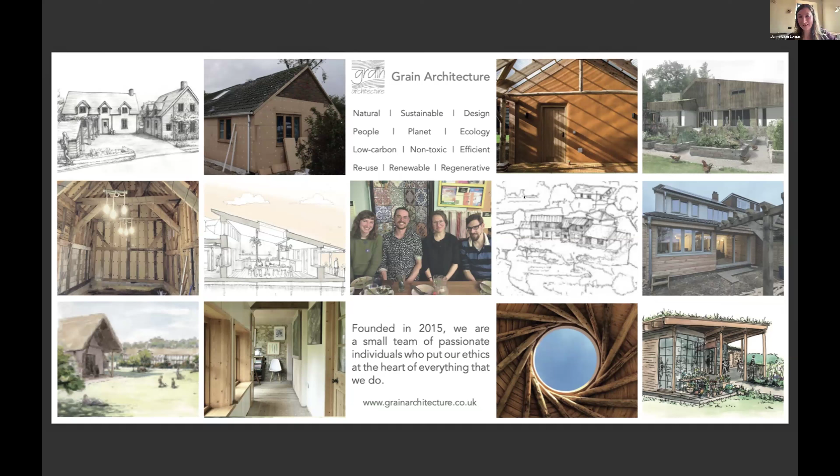Okay, thank you very much for having me. I am Janna Laan Lomas, and a little bit about my background: I work with an architect's practice called Grain Architecture, specialising in natural materials. I'm quite an advocate for natural materials generally, and we do a lot of projects with them, for all sorts of reasons, from resource depletion through to carbon footprint and healthy, non-toxic materials and building.

But we're obviously focusing on Llama Croft, which is my dream house, which I've been lucky enough to see come to fruition. It's still on site, so we're not quite finished. I'm sat in the kitchen at the moment, there's a few things going on around me, but I'm going to talk you through a little bit about how the building is made, the materials, how the materials work specifically with moisture, and give you a bit of a slideshow of where we're up to so far with the project.

So just starting at the beginning, this is us buying the site three years ago.

And there was a little old cottage. After much deliberation, we decided to dismantle the cottage and reuse the materials rather than retrofit. I'm not going to get into that now, but more could be said on that, obviously.

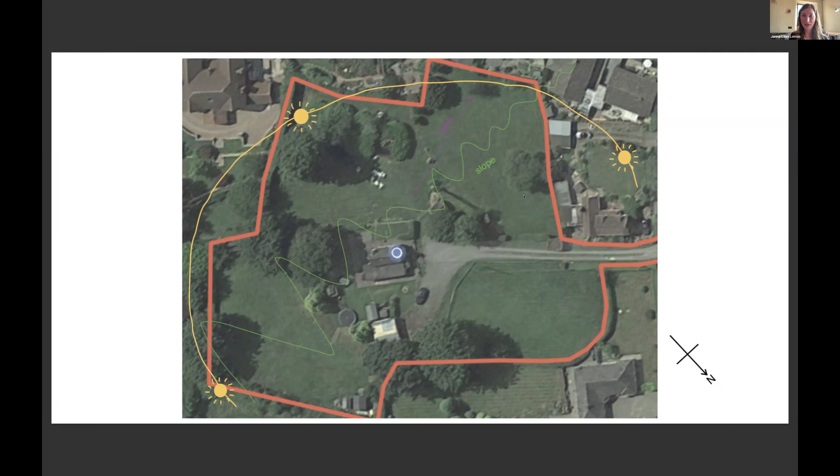And we're very lucky, we've got a lovely site, southwest facing. We also discovered very early on that we have amazing clay. We're based in Hereford, and Hereford has this really gorgeous red clay. So we tested that out with making our own clay plaster.

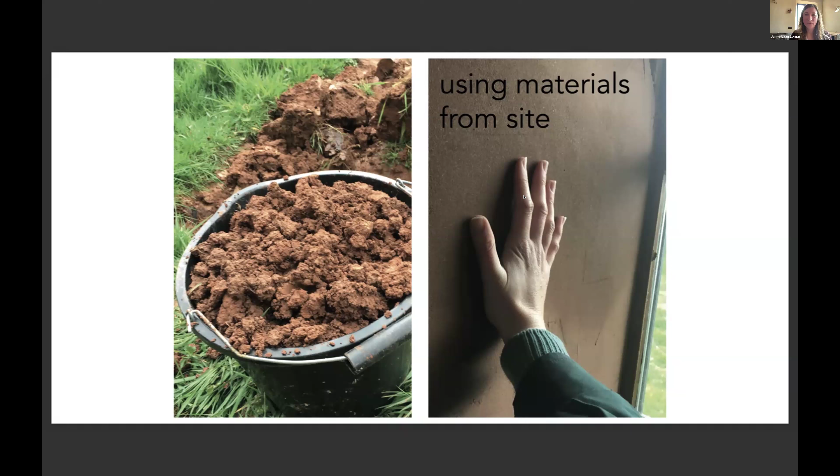So we started off by actually building a little tiny house. Here it is, which we lived in, and are still living in 2 years later, throughout the build process. But this was a test ground for the clay plaster, and we were really happy with it, so we decided we'd do that in our house.

So that's one of many natural materials we've got in the house. I'm a huge advocate of natural materials generally, so I don't have necessarily one favorite that I'm pushing more than others. We've chosen a system for various reasons, but we've tried to include as many different natural materials as possible in the house. Partly because we just want to show them off and share as much information as possible about them, but they also have really good properties, a lot of them.

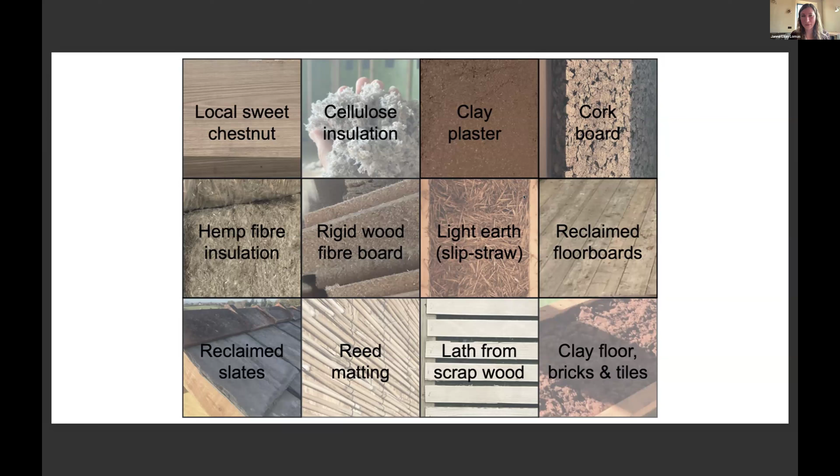So the system we've chosen, for various reasons—a large part of the reason was timescale, to be honest, speed of building, but also quality—we decided to go with a prefab timber panel system. That is basically filled with cellulose insulation, which is old newspaper, and then wrapped externally in wood fibre board.

The floor, walls, and roof are all made like that, but the floor and roof are not prefab panels, they're sort of the same idea. And then the walls are prefab panels.

This is a section through the floor. So we're just showing here that we've lifted it off the ground, away from moisture. We've got a well ventilated space under the floor, and that means that we don't actually have a damp proof course or a damp proof membrane, as it were. So we haven't got any membranes, really. I'll talk a little bit more about airtightness membranes in a minute, but no vapor membranes or damp proof membranes.

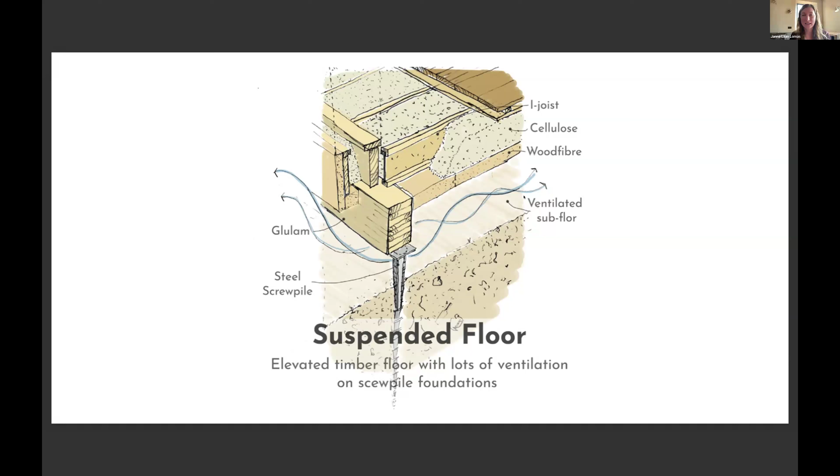Here we've got the screw pile foundation, a glulam ring beam, and then on top of that we've sat the joists for the floor and then the structure for the walls. So here you can see the structure for the walls as well. We've got a Larsen truss, which is a split frame, uses smaller timbers, which is great. We've managed to use C16 timbers, which is great, so they can be UK sourced. And also it means it's more thermally broken.

So another reason we went for the prefab panel system is because we wanted to go for Passivhaus certification. We've collectively done talks on Passivhaus, so if you're interested in that, go and look there. But basically, what that means is it's really thermally efficient, it's airtight, and it's minimizing thermal bridges.

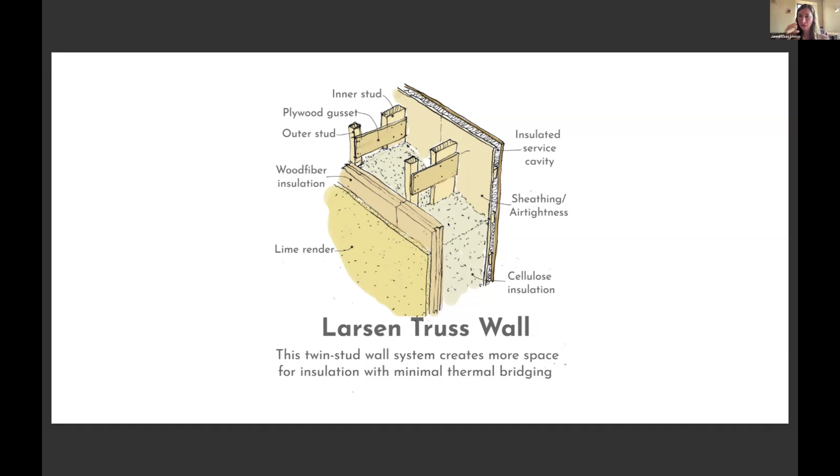So this shows the spaces—yeah, so these timbers are joined just with small gussets, but most of the two sides are kind of separated. And the same happens with the roof. We've got a sort of thermal bridge free eaves detail shown here, and again, this shows the sort of separation.

And then we've got the wood fibre board wrapping all the way around the outside in one continuous layer, and that's a really good way of reducing thermal bridging generally. But we've also reduced having any timbers fixed through or penetrating through that layer to create the eaves overhang by doing this.

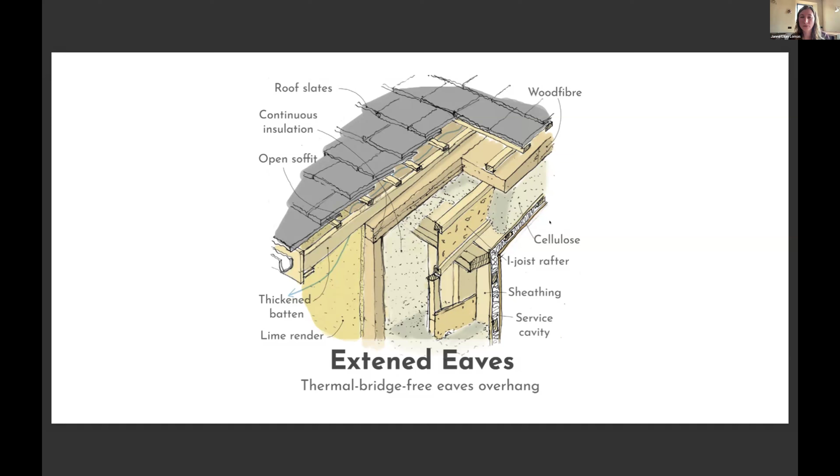You also might notice we haven't got any membrane on the roof, and that's also to reduce plastic, but we don't need it because of the wood fibre board. This is a type of rigid wood fibre board which is relatively hydrophobic—what that means is the water, if there is any rain that comes through, runs off of it and doesn't really soak in or penetrate, so it doesn't need a membrane. This only works with roofs of a certain pitch, not flat roofs or low pitch roofs, but with this it works really well. So that gives you an overview of how we've made it.

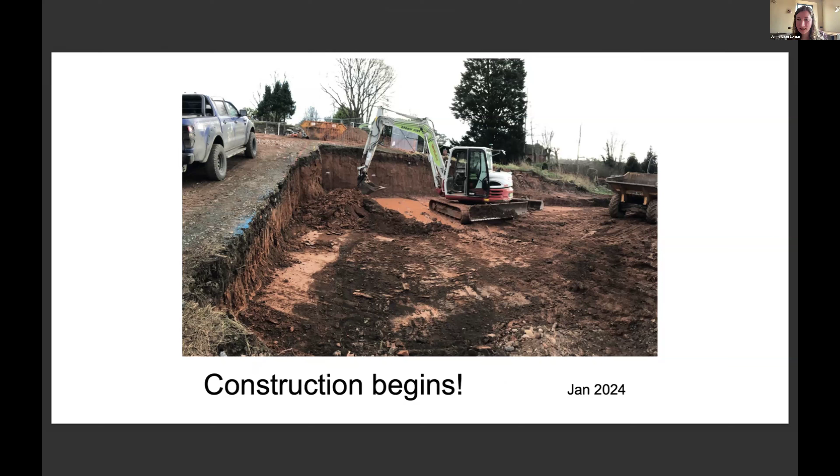So we started January 2024, just about January, February, with a lot of mud on site. So a lot of groundworks were going on site. Meanwhile, the prefab panels were being built off site.

And then by March, I think we still had a lot of mud and rain, but the foundations started going in, the screw piles. And these are wonderfully simple. I think Seb might talk more about these.

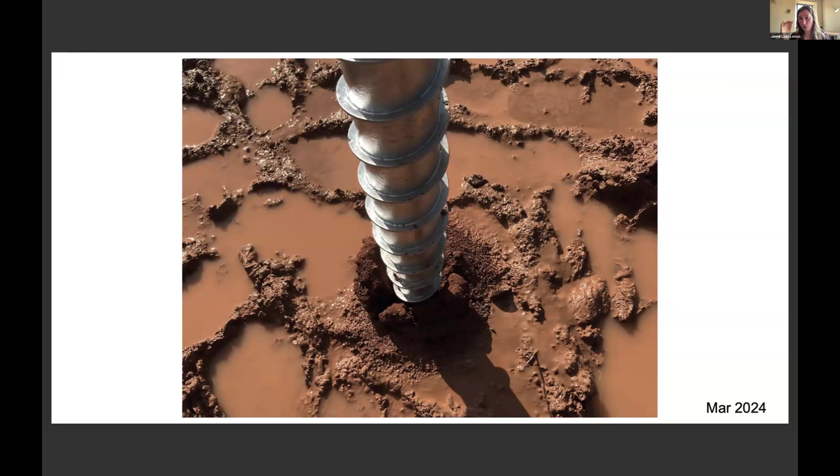Yeah, so they're very simple. They're only actually 1.6 or 1.8 meters long. And yeah, they simply screw in and hold the house down. So that's it from above.

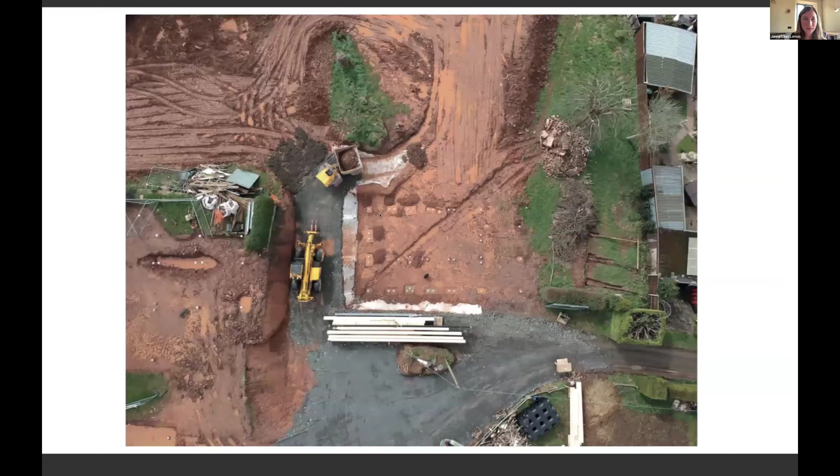Seb's got a drone, so we've got some lovely footage from the sky, and you can see there. Can you see that zoomed in? Yes, awesome, that works. So yeah, so we've got you can see all the screw piles there.

They had to actually dig slightly around them to just get the fixings for underneath into the glulam, and a land drain as well, just to make sure the drainage was there.

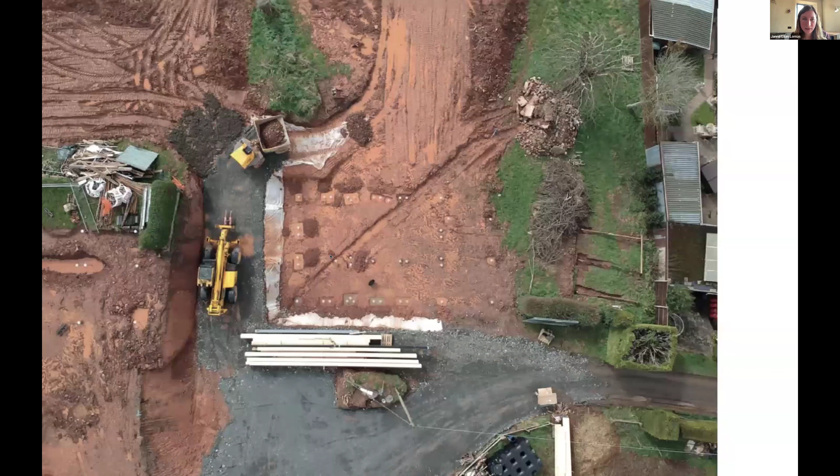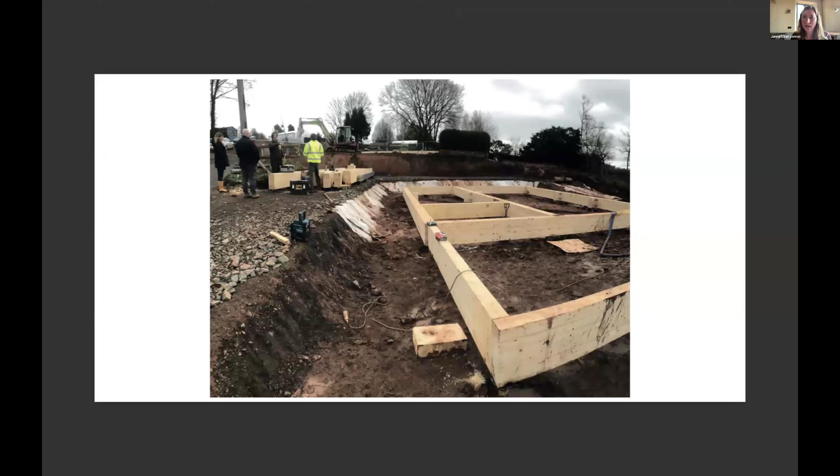So then they fixed the glulam ring beam on. There it is. And then we started with floor joists, the rigid wood fiberboard on the underside, which was a fun job for someone to do the fixings.

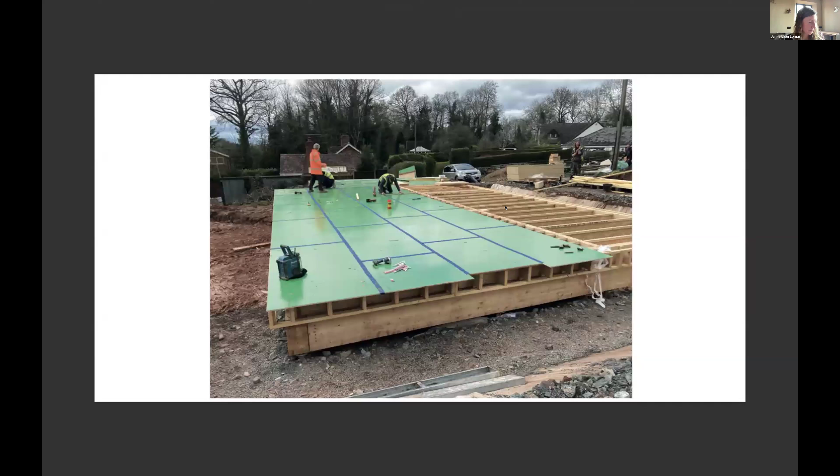And then the pro passive board. So this green board is the only real sort of plasticky bit in the building, I'd say. And it is also the least vapor open.

So one of the major drivers for using natural materials is about the moisture management properties of them. I'm going to assume a level of knowledge here and explain that moisture, or water vapor in the air, will always be attracted to cold surfaces. In this country, primarily, that means in winter, the outside is colder than the inside, so the outside is attracting more moisture generally because it's colder. So we have a sort of direction of movement, and that means that we want to avoid having a surface which can trap moisture on that cold side, on the cold surface on the outside.

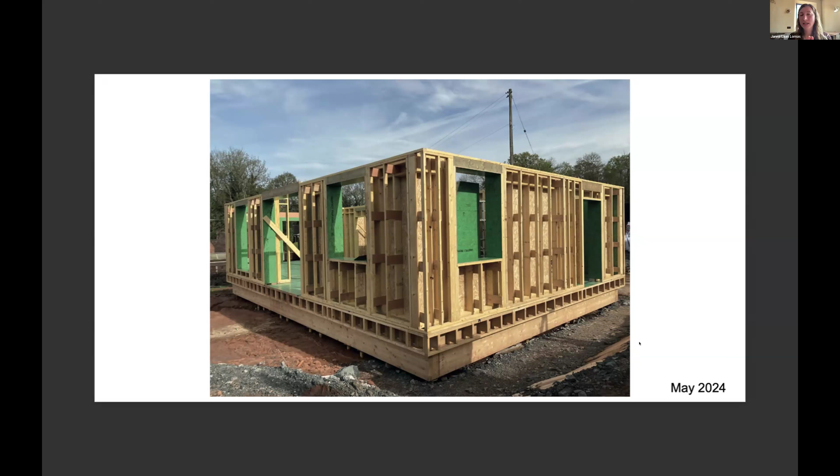So we have a vapor permeable buildup on all sides from the airtight layer outwards, but the airtight layer itself is actually not particularly vapor open. As you can see, there's this green film, which is adhered to the OSB boards. The boards are needed for racking strength anyway, and they're already not very vapor open. So it's not vapor open and closed, it's not binary - there's a sliding scale, vapor permeability. It's not 100% closed, but the OSB boards are relatively closed compared to the other materials we're using, which is the cellulose, the natural wood and wood fibre board, and lime render.

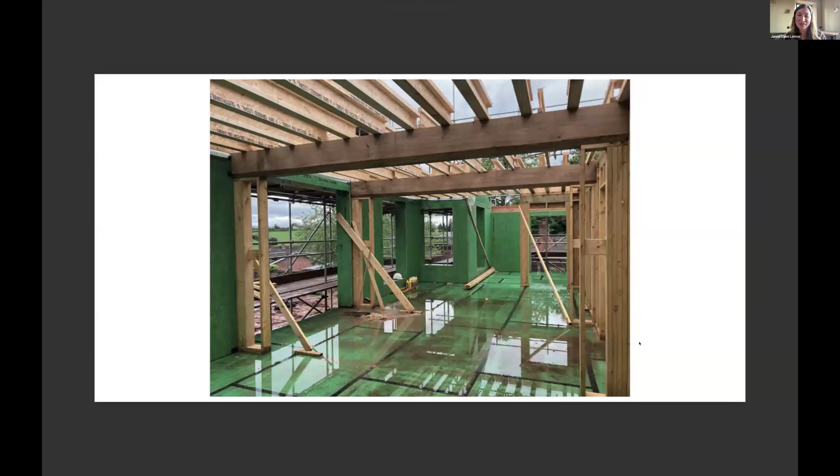So yeah, moisture, you can see doesn't really, there's a lot of moisture there. It was raining whilst we were doing this. But yeah, these panels were great because they go up very quickly.

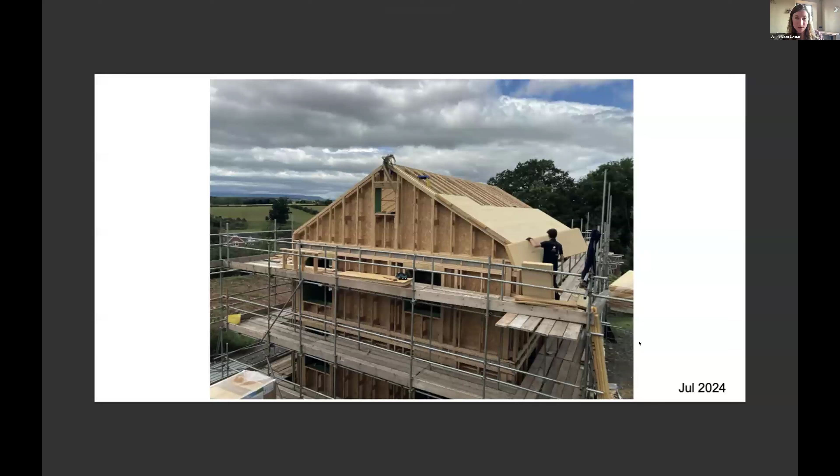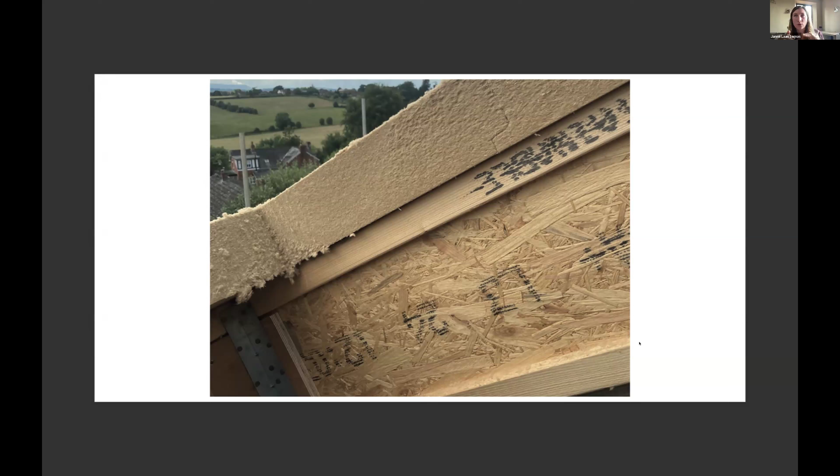And then we got to, this was last summer, we got to starting to wrap the outside with wood fibre board. And there you can see the nice joints. This is quite thick - I think we had 100 mil on the roof and underside of the floor of wood fibre board, and 80mm on the walls. And then the actual thickness of the insulation was 300 for the roof and floor, and I think was it 340 for the walls, something like that.

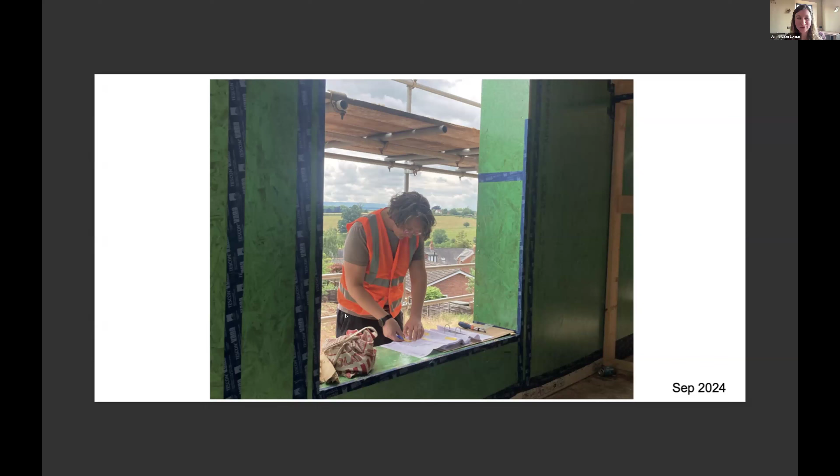So yeah, that went on, and then no membrane, but there you can see the lovely slates going on, reclaimed slates, of course. And there's Seb putting in some moisture meters, which he's going to talk more about. But this has been a really interesting thing to have data from.

Windows and doors went in. Here you can see that eaves detail, again, the wood fibre board wrapping around. And yeah, all the timber panels slotting together.

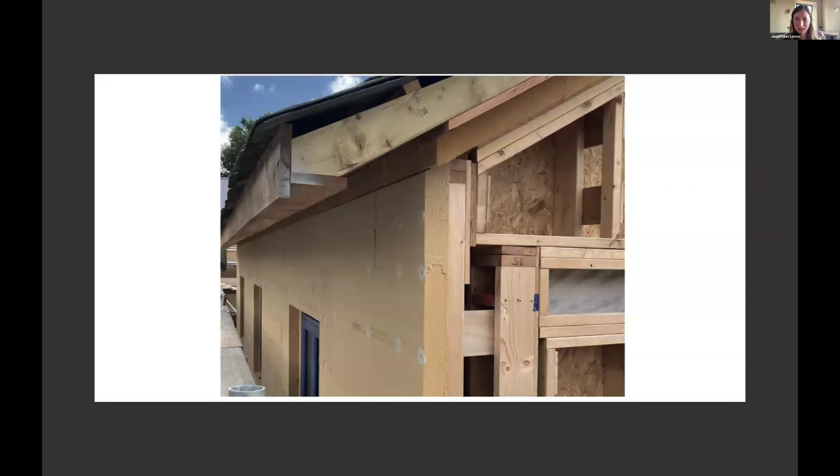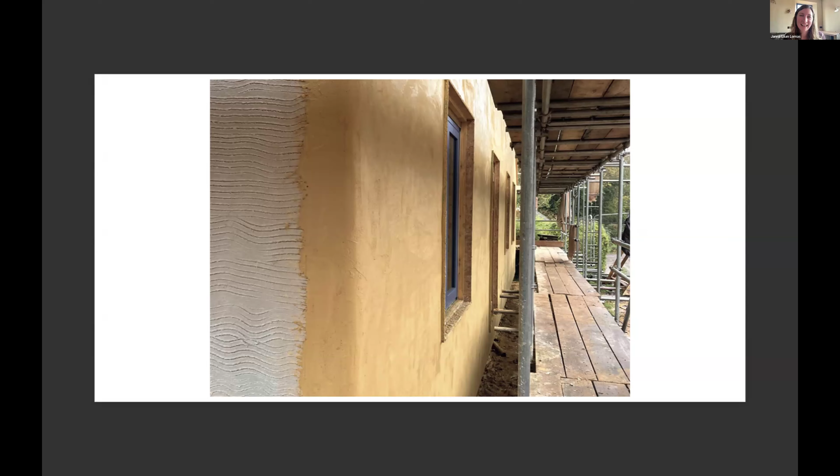Just some nice shots there. We started the lime render on the outside, so the lime render goes straight onto the wood fibre board. Got the base coat, scratch coat, and then the top coat, which is pigmented, so it's got a lovely yellow colour. And there it is. It doesn't look very different now, really, but we're still landscaping the outside.

So then at Christmas, we basically started work inside after they finished insulating it. So here you can see them, they cut the holes and pumped with the machine - it's like a vacuum cleaner in reverse that sort of pumps the cellulose insulation into all the cavities in the wall, in the cassettes. And then they tape over the holes again afterwards with this airtightness tape.

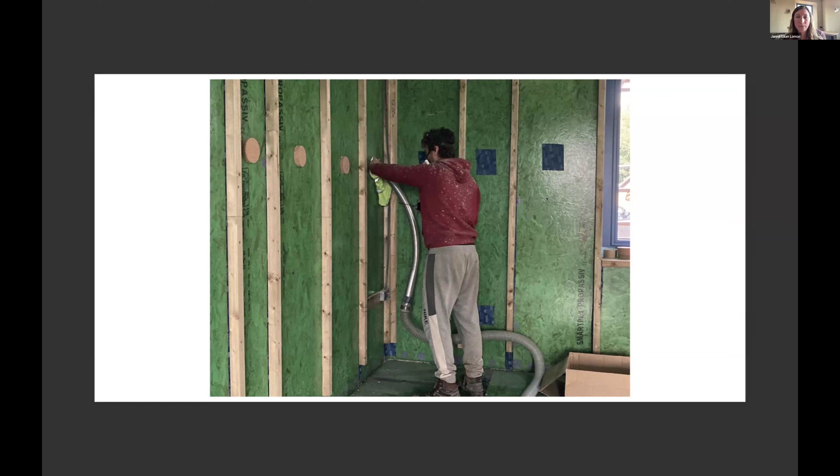And that's really important because of the moisture wanting to move towards the outside where it's colder generally. So it's important that's managed well, and that if there's a layer that's less permeable, it's on the warmer side rather than the colder side, to avoid any moisture being trapped in the wall. But on the inside of this

airtightness layer, we've then used a whole myriad of lovely breathable materials, many of which are also hygroscopic, which means it goes one step further than breathability. It means they can actually manage the indoor humidity by sucking in moisture when there's excess humidity and holding on to it, and then releasing it again when the humidity levels drop.

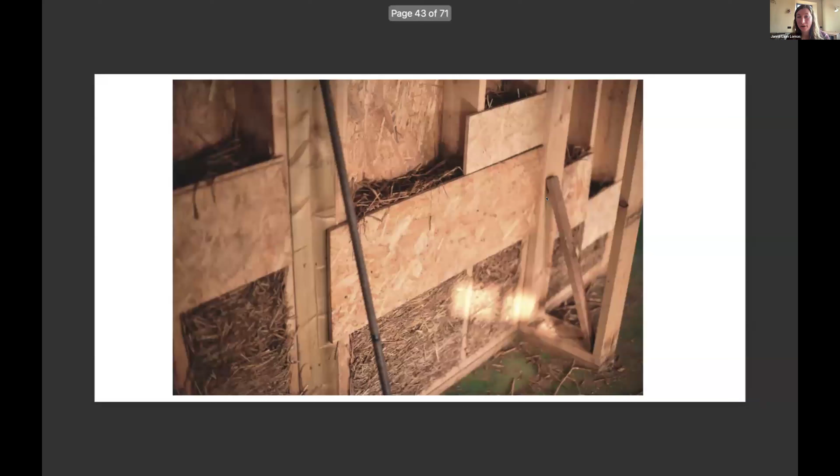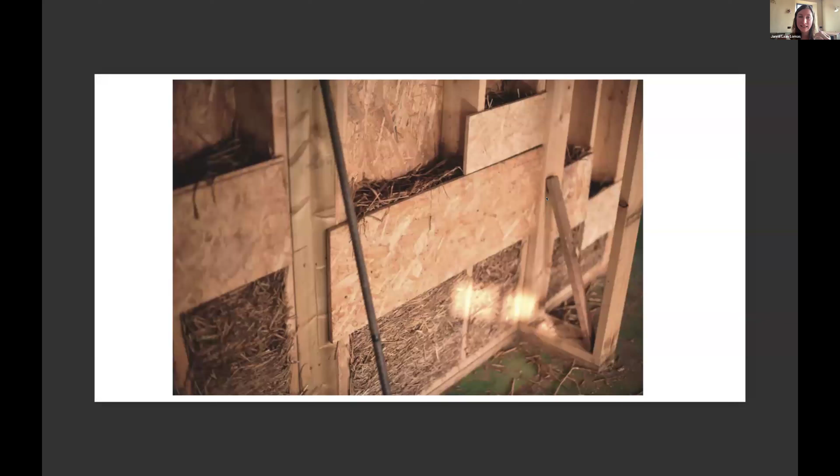Wood is very, very good at that, but also clay, and we have this lovely clay. So we've ended up with a lot of clay-based materials and clay plaster. This is showing light earth, which is a type of insulation with straw tossed in clay slip and then tamped into the wall, a bit like hempcrete. And then you remove the shuttering and it dries out. Great surface for plastering. This provides us with insulation, both thermal and acoustic, but it's an internal wall.

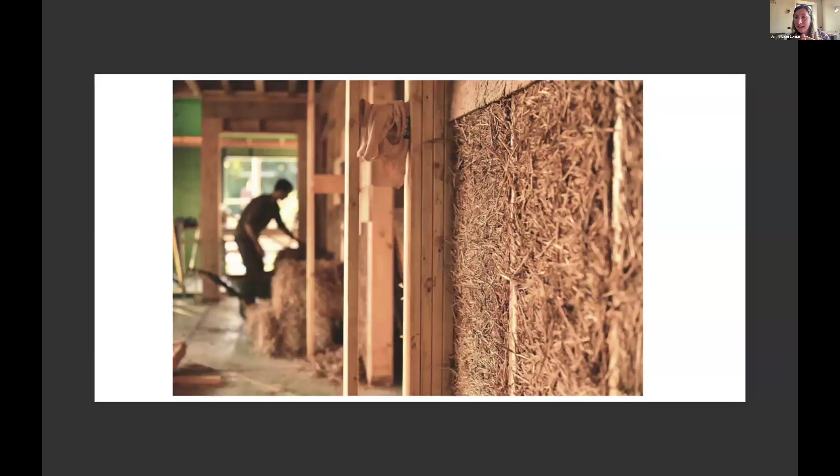And we also had quite a lot of waste timber, which we turned into lath. This was a fantastic way of using up the waste from the site, because the building site generates a lot of waste timber. We've reused as much as we can in various different ways, but lath was a really good method.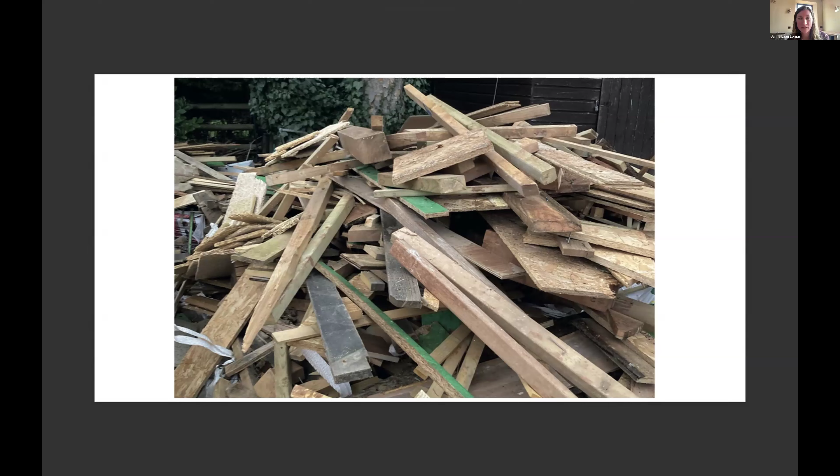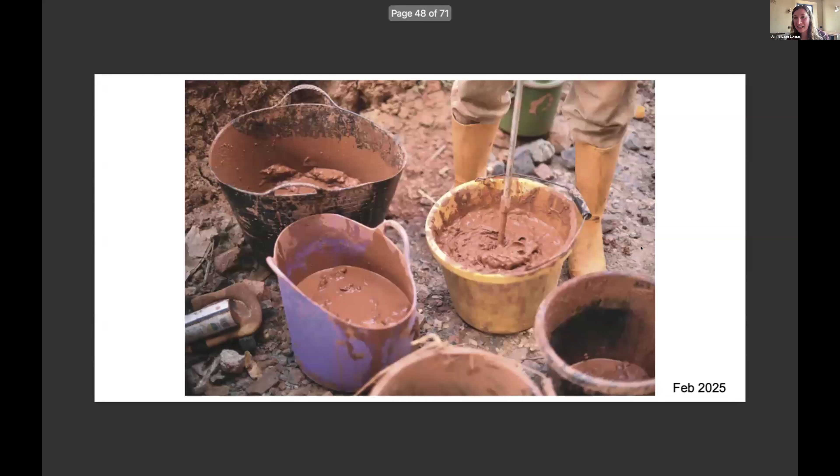We've also used reed matting to plaster onto, which has been great, particularly onto the internal OSB walls. And there we are, mixing up some lovely red clay and putting it on. And that's been really, really good at sucking in the moisture, managing that indoor air humidity.

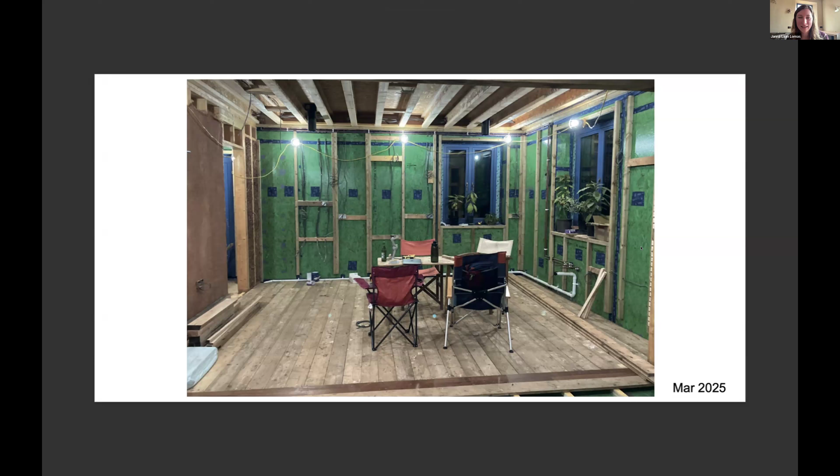And that's the kitchen where I'm currently sat, looking a bit different. That was March this year. And Seb did the floor. We've come a long way.

We're also using scraps, including wood wallboard, which is just for window reveals.

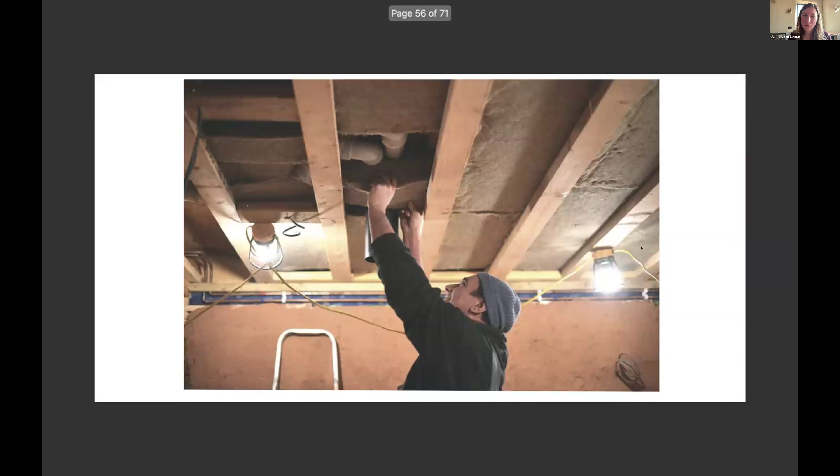We've also used hemp fiber insulation in all the intermediate floors, and that's also very good at managing moisture and also very good at acoustics. It's a lovely material.

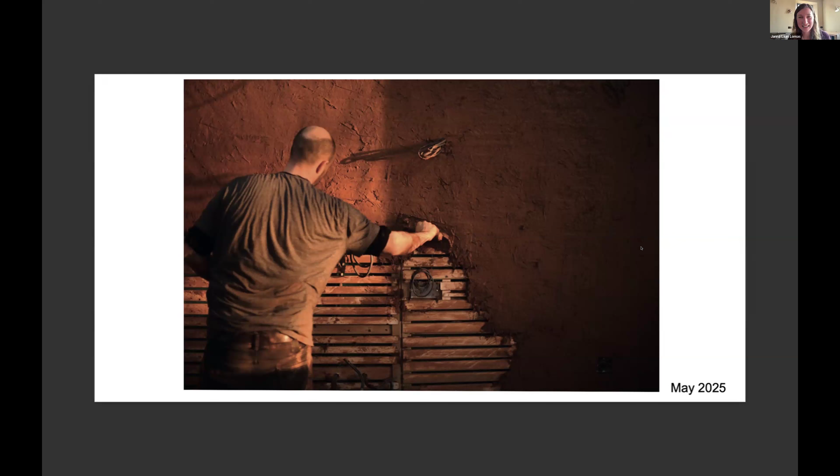This is just a nice picture of clay plastering. I just really like this picture, bringing out that lovely red colour in the clay.

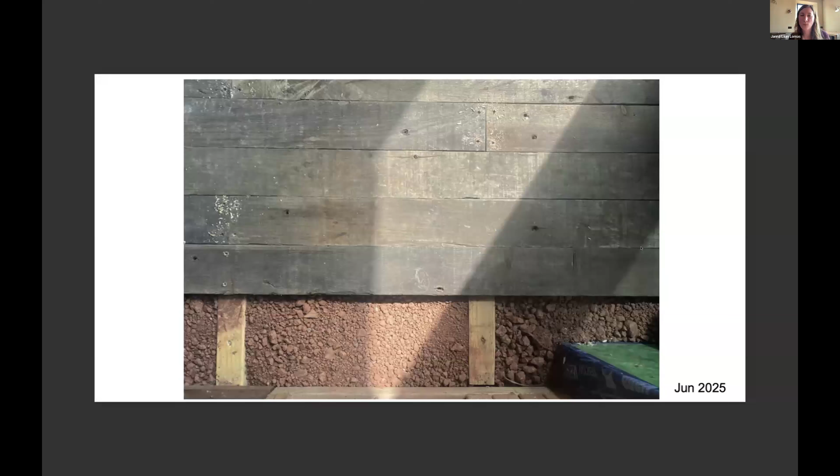We've also used earth in the floor. So we've got this service cavity all the way around, which is normal, but we've also got it on the floor. And what that means is we can fix down the floorboards into the battens, not penetrate the airtight layer. We also have this void between the battens, and I decided let's fill it with clay, because that will help with both moisture and temperature, so we can use that as a bit of a thermal store. Here you can see the sun hitting it, and it beautifully holds that solar gain, that warmth.

It's really nice, so still working our way through it. I'm almost there now. Seb's been doing some joinery as well, and this is us this week. This is where we're up to. Still a building site, but we are getting there.

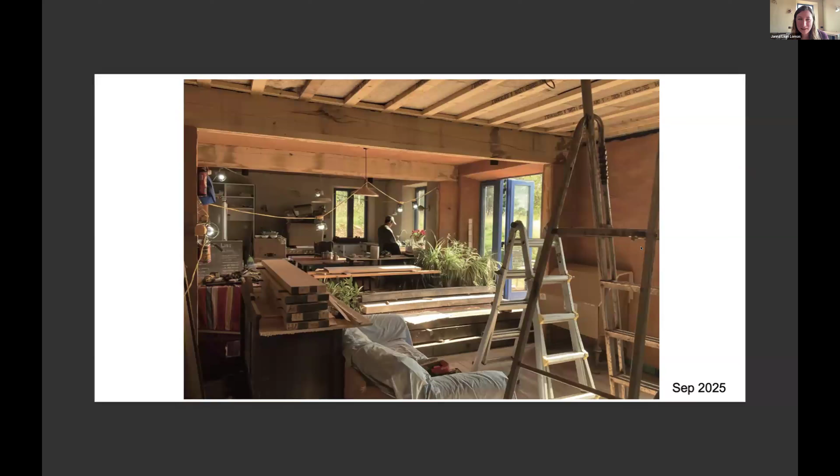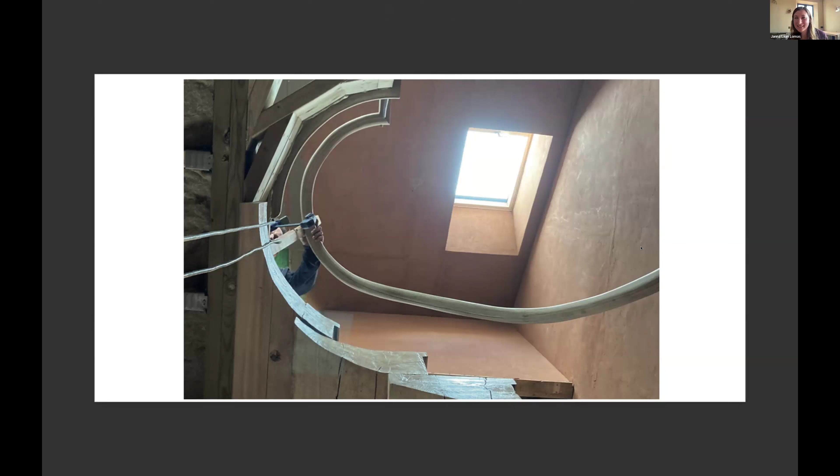And then we have this lovely staircase going in, currently built by Carwyn, who is sat in the room with me here smiling. And there he is building our stairs, which are these really nice oak chunky stairs. I just had to share that with you.

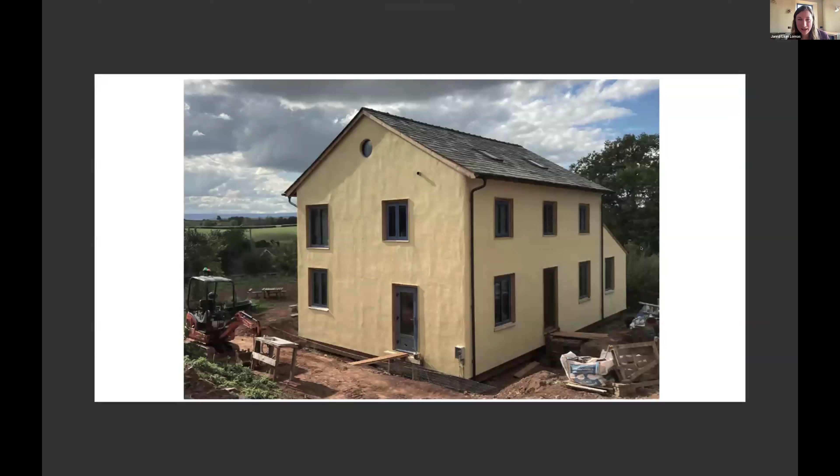They're still being built, so I can't share finished pictures, but they are looking rather lovely. And that's it, that's how the house is made. So I'm now going to pass over to Seb to talk a little bit more about the moisture meters and the data that we've got from them. I think that's your focus, isn't it, Seb? So yeah, over to Seb.

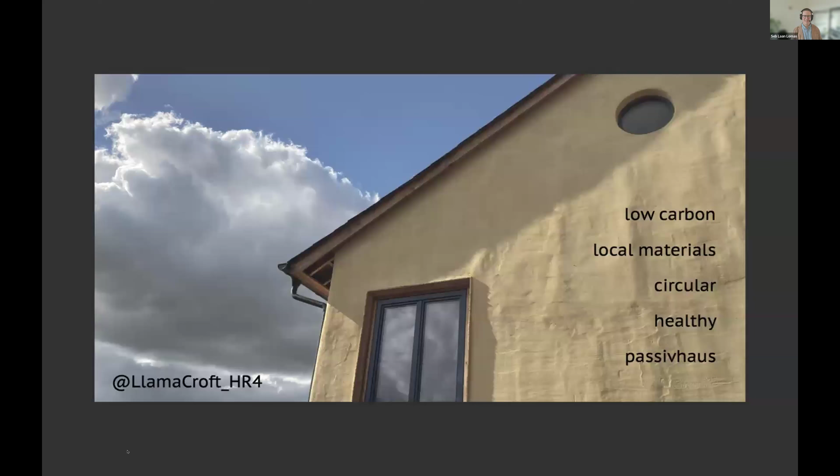We appreciate it. I'm Seb, Janna's partner, and I'm going to talk a little bit about some of the sensors that we put into the building. As Janna mentioned...

Some of the things that we've been doing are things we've wanted to explore. There's one's understanding of how something should work, and then there's the other bit of actually having the hard data behind it to be able to show it has done what you said it was going to do, or hoped it was going to do, and maybe not - maybe there are some learning points. So that's why we've gone on this journey from a data perspective.

Just from a bit of scene setting, I'm sure everyone on this call is aware just how significant moisture is from an insurance perspective. There are now more losses from moisture than fire in the construction sector, and despite a lot of the research actually being around fire and not so much around water, there isn't as much guidance.

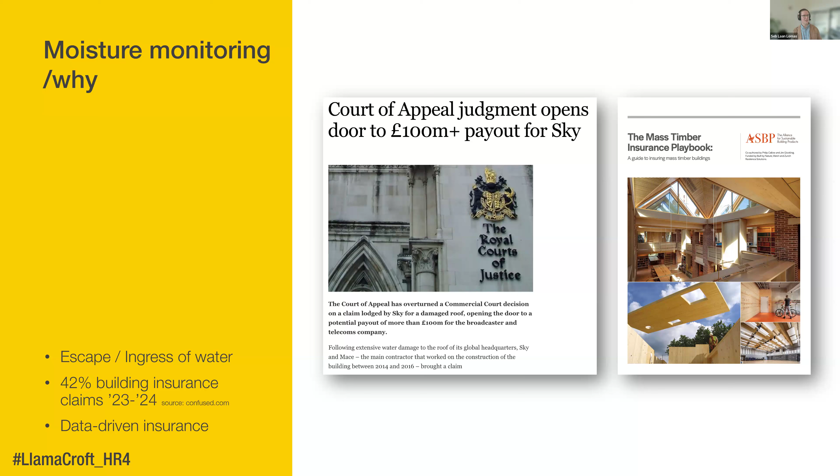Matthew shared a really interesting one that TDUK put out recently about managing moisture in construction, which I definitely recommend having a look at. But it's an aspect of construction that needs still more clear guidance on how we can mitigate, and then also demonstrate that we have mitigated those risks, because that's a really big part of negotiating and courting the insurance, as some would say.

But from our perspective, this was more led by curiosity in the work that we do in our practices. We want to be able to advocate for these platforms, these approaches. So our house was a really nice test bed for trying out a platform I had never used before - I was introduced to Tector, which Ben Sharples is going to talk to you more about, the company itself. But it's a really nice, simple platform.

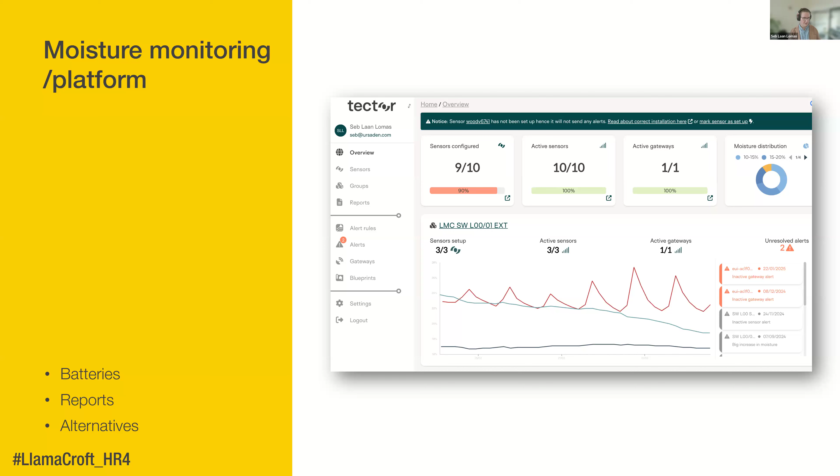It has these very small units - I haven't got one to hand - which you then just build into the building. The data is streamed to the platform, which you can log into and run reports. It also triggers alerts if something changes by more than 5% in an hour or so. We have used other platforms and sensors at Architype before, but this is definitely the most progressed and user-friendly one that we've come across.

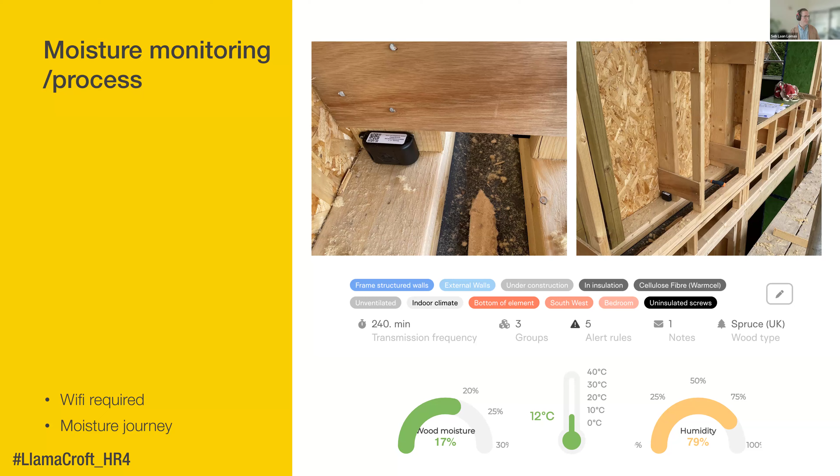And as you set up these items, you take photographs, you put in all the metadata about where it is, what it's connected to, is it insulated or not. And then the 3 bits of data it's collecting are the moisture content of the piece of wood it's screwed into, the temperature surrounding the sensor, and then the relative humidity surrounding the sensor. Interestingly, this is an emerging sector - there's no quantitative guidance on where you should put them, how many you should have.

It is a qualitative judgment. So we decided to focus on the things that we were interested in learning from.

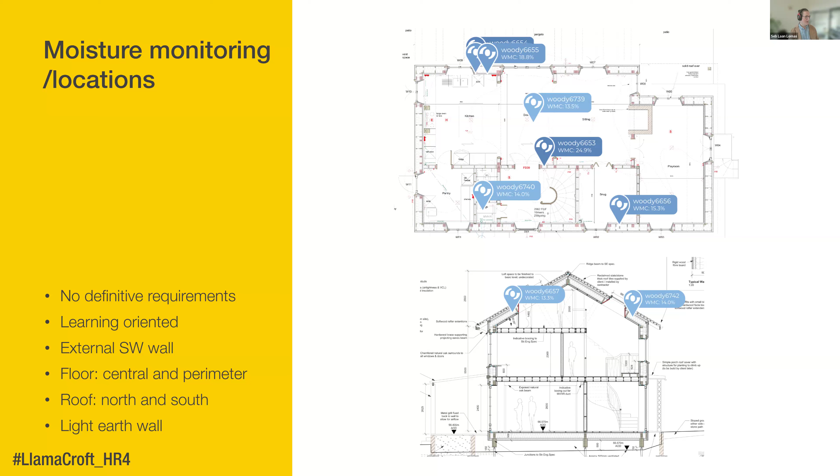We've put sensors through one of the external walls, so we can actually see the moisture movement through the wall. Put some in the roof and some in the floor, and also the light earth wall that Janna shared in her presentation. I'm just going to take you through some of the outputs and findings we've had to date.

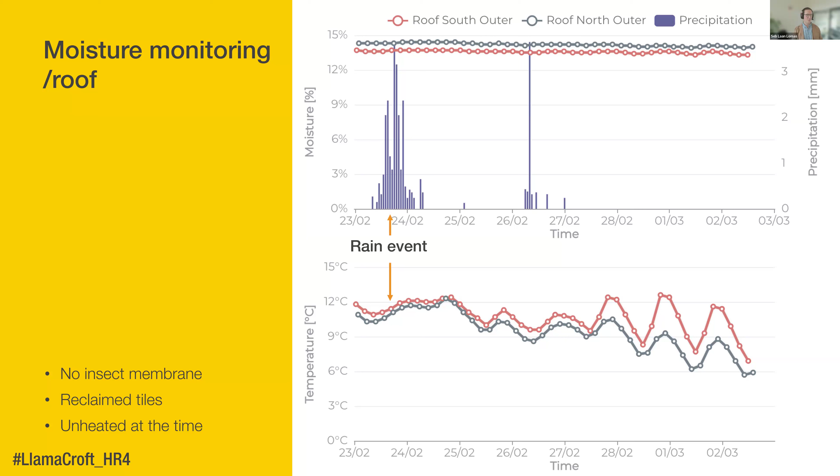What we were able to show from this is that the moisture content in the roof below this buildup has been exceptionally stable, even with the very heavy rain events you can see with the vertical blue lines on the graph. This platform automatically draws on local weather data.

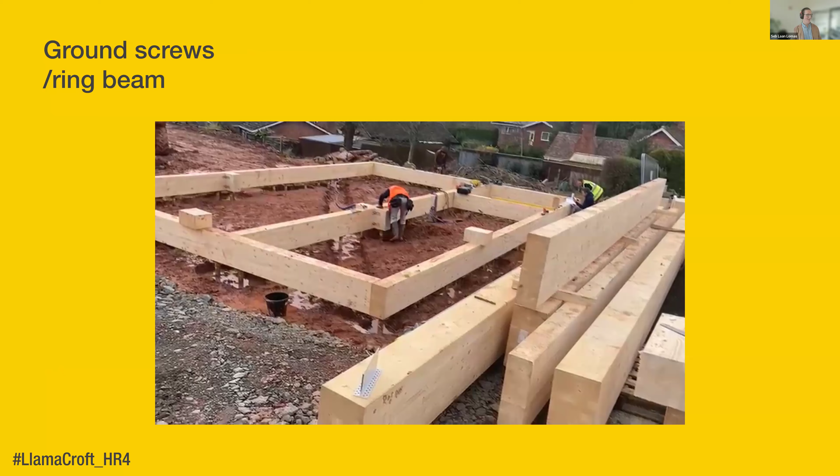As Janna mentioned, the ground ring beam is a glulam system sat on screw pile foundations, which were a delight to finally use on a project. There are loads of reasons why we wanted to use screw piles - touching the ground lightly, something that goes in quickly, but also it's 70% lower in embodied carbon. And that's not just because it's easily reusable, but the production of it has a lot lower emissions, as you can see from these EPDs.

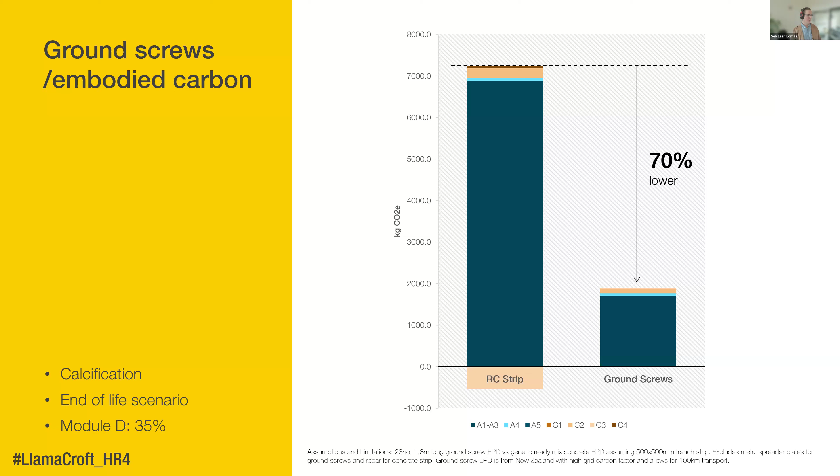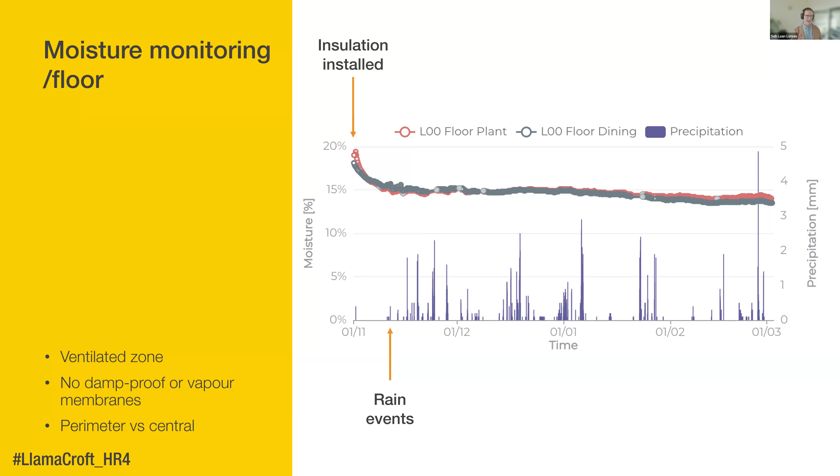With that ventilated space, we wanted to see how well that worked from a moisture perspective. We all thought it should work, but it's nice to have the data to show that it does work. What you can see here is 2 sensors underneath the building, in the floor buildup on the ground floor, the moisture of the timber drying out as the insulation's been installed and the building's warming up, and that moisture content coming down below 15%. That's both within the middle of the floor plan and by the outside of the building. We wanted to see if there was a significant difference between those two.

This has been a really interesting insight. This is the external wall of the building facing south. So we have sensors here on the outer timber of the Larsen truss, the inner timber of the Larsen truss, and also inside the service cavity, which is the light blue line you can see here.

What we've been observing here is, as Janna mentioned, with a breathable construction, the wall is able to absorb and desorb moisture. What you can see in the bottom graph is the outer timber is absorbing and desorbing on a daily basis as it responds to the temperature. As the sun swings around, it starts warming up the plaster, and the moisture is drawn into the cooler element of the wall buildup, and then it desorbs back. But what's really nice to see is, even though the outer timber is fluctuating in that safe zone, the inner timber is completely unaffected by this absorption and desorption going on daily.

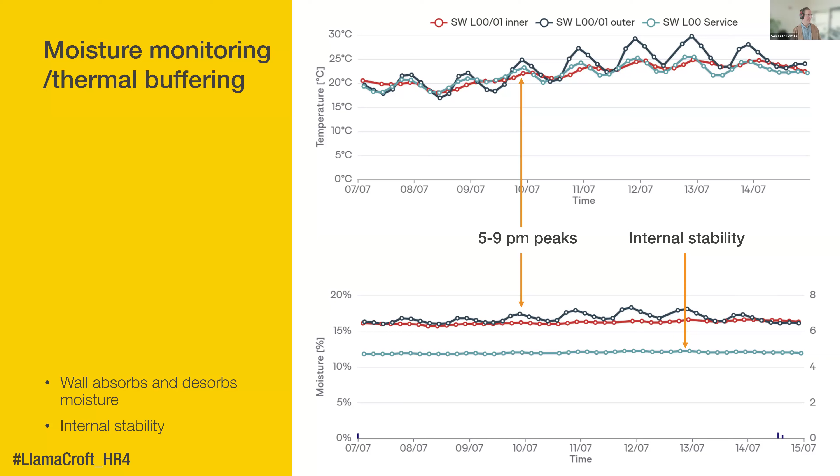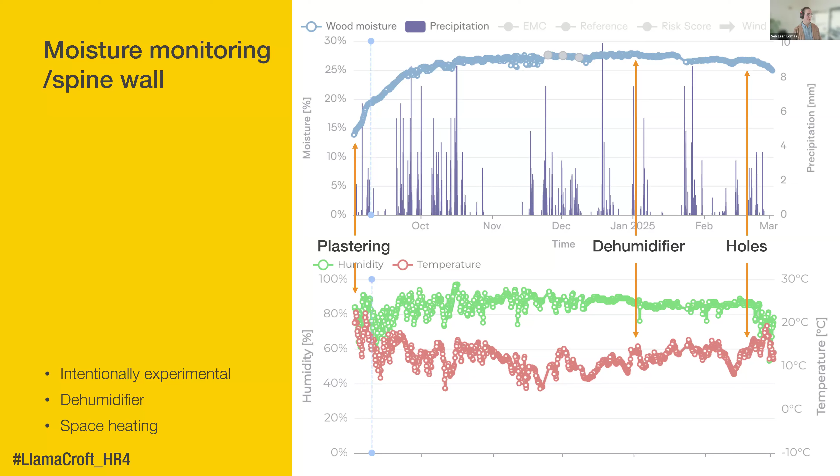Janna mentioned this spine wall where we use light earth, and we had some OSB board. What this experiment showed is that OSB really does inhibit the drying out of light earth construction. You can see the moisture content racing up, and we used dehumidifiers, and then had to drill holes in the OSB to draw out the moisture. But again, putting in the sensors gave us that feedback. This was an experiment - we knew it wasn't ideal, but getting this feedback in real time was really interesting.

Similarly from the external wall - what this graph is showing is actually the sensors just before the external wood fiber board that Janna mentioned was installed. The timber frame got really wet from a series of rain events. It was a really horribly wet year in 2024. You can see here the moisture content of the timber getting up over 60%, which is way too high, and certainly not an ideal moment to then clad the building in insulation. But as Janna mentioned, with the breathability of that whole wall system, the Tector sensors were able to show the frame actually drying back out over the next period.

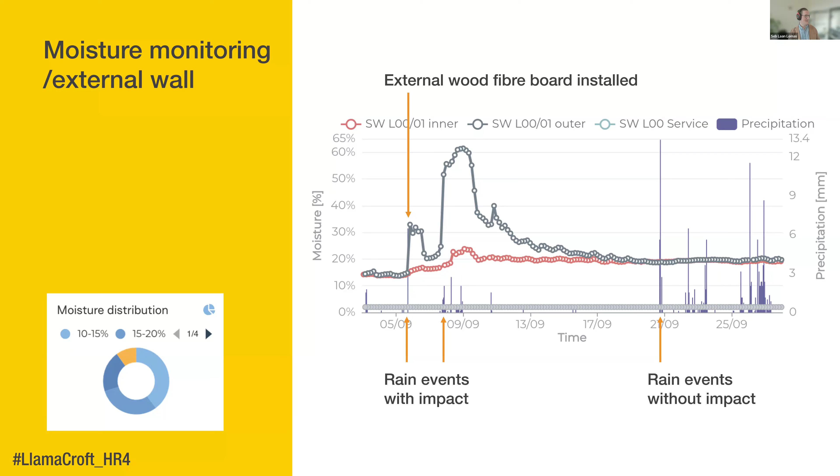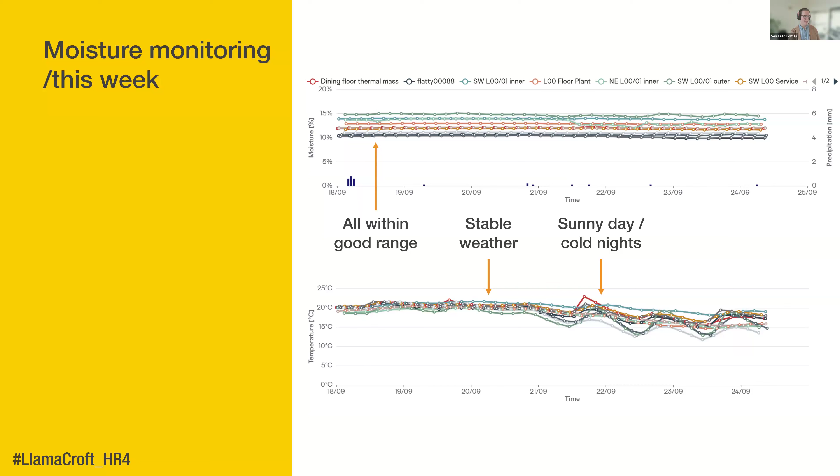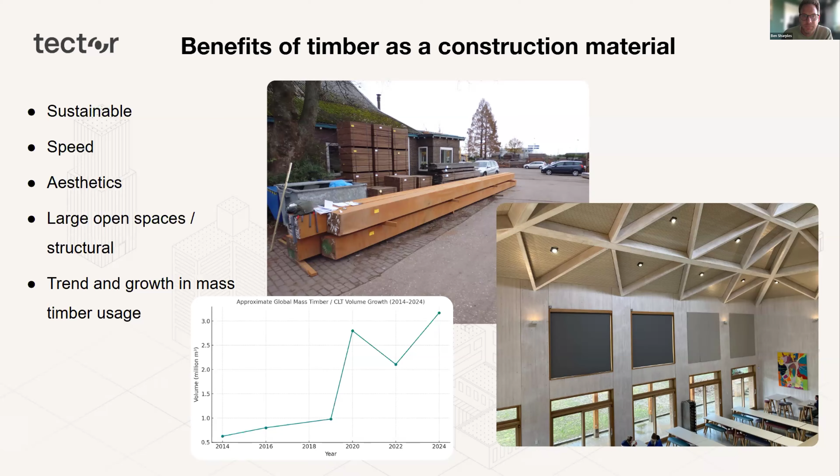But with that, we do obviously need to understand the vulnerability side of timber as a material. Once we have a good understanding of that, we can plan and build into the design ways to mitigate the risks associated with it.

Timber, as Janna said earlier, is a very hygroscopic material, so it's predictable—it absorbs moisture and reacts to ambient conditions. If there's an external source of moisture or liquid moisture in the air, it can retain too much moisture for too long a period, and that's when you'll get signs of fungal decay developing, which can affect and damage the structure.

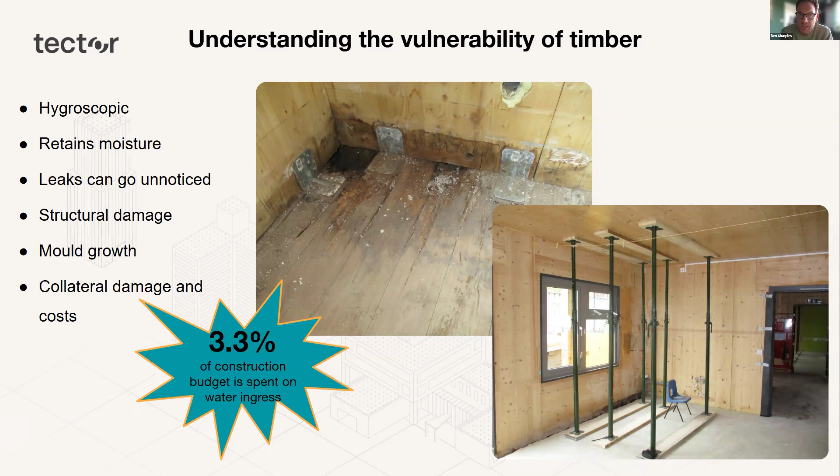An interesting figure that stands out to me is that currently, on average, 3.3% of the construction budget is spent on water ingress alone—that's during the total construction budget. One of the big contractors I was speaking to recently said their average is about 2%, which sounded quite good, but still, to them, 2% was a lot of money being spent on something that, in theory, can be prevented.

I think Seb's given you a really good understanding already about our system and how we look at data to determine whether we've got leaks, let's say. At Llama Croft, you're looking at the performance and the changes in moisture content of the structure and the drying times and that sort of thing. The system can be used in all sorts of different ways.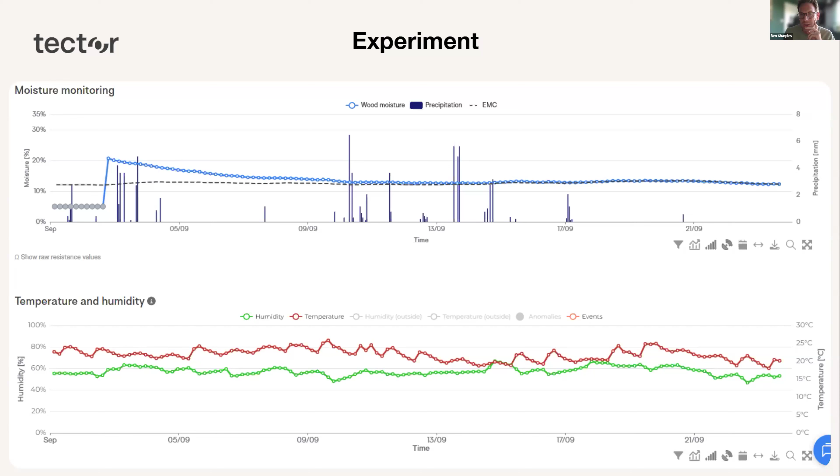The timber's nice and dry, it's on the equilibrium moisture content line, no problem, and then they get installed on site, unfortunately in the middle of winter, which for some reason seems to happen with timber structures. We install them in the middle of the winter, and it's got very wet.

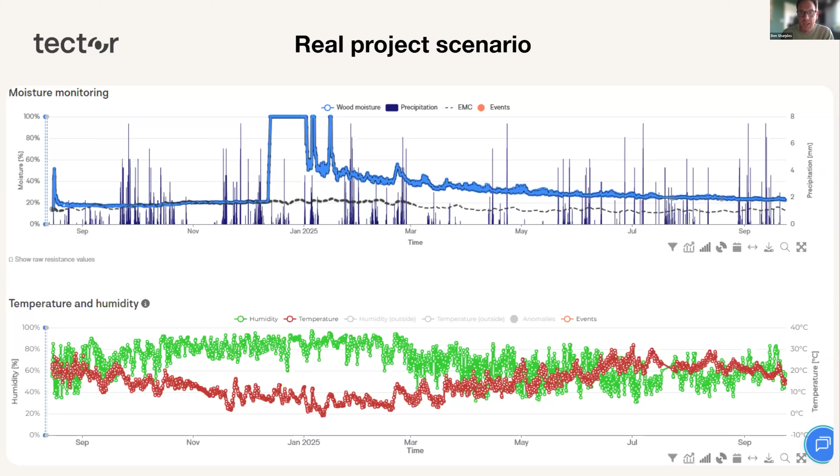We know that 20% moisture content is the decay threshold, so we want that moisture content to be below 20% for it to be safe from the development of decay. Unfortunately, this one is taking quite a long time to dry, and we're working with the project team on this one to get some expert advice in, just to mitigate any problems that they might have. But they have a clear view on what's going on there in their roof.

And I'll take you through a few case studies of ours. This is a project in Copenhagen. We're a Danish company, so we have a lot of projects in Scandinavia generally. But it is an organisation that was building a movie theatre on top of an existing building.

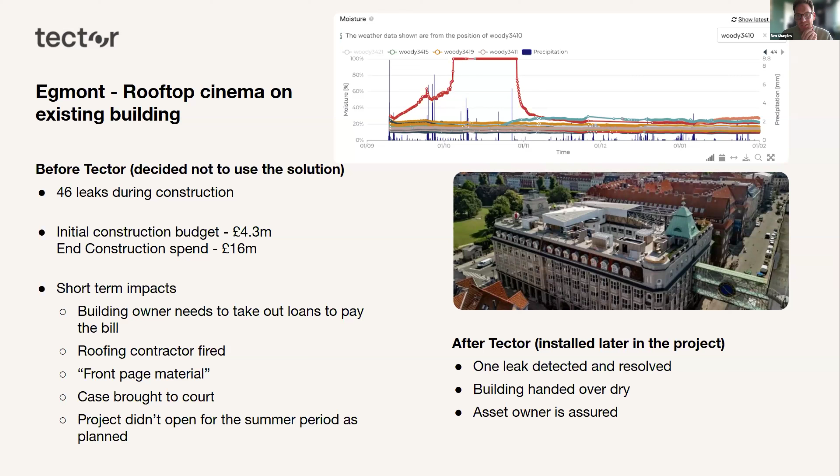They got in touch with us and wanted some sensors installed there. They decided that they didn't really want to spend the money on that, and they'd take the punt on not going for that. Unfortunately for them, they did have 46 leaks during the construction period into the original building. Their initial budget of 4.3 million turned into a 16 million pound project as a result of water ingress. It hit the headlines. They took the Tector solution later on in the process. We found one leak after that, which was detected and resolved quite quickly.

Another one is the Mary Elizabeth Hospital. It's in Copenhagen. As you can see, lots of different sections of flat roofs. This isn't actually a timber roof, this is a concrete flat roof situation. So we put sensors above the concrete in the flat roof environment.

Basically, we're able to install the sensors as each roof section was completed. The roofers would move on to the next section and so on. What was happening is the sensors that were installed in a completed roof were picking up leaks in the roof. It was quite handy for the main contractor because the roofers were still on site, so they could go back, fix those roofs, and make sure they all dry before they carried on.

Unfortunately, after 34 or so leaks in these roofs, the main contractor decided that the roofer wasn't quite performing in the way that they wanted, so they changed the roofing contractor, completed the rest of the building, and were able to hand over that dry to their main client at the end.

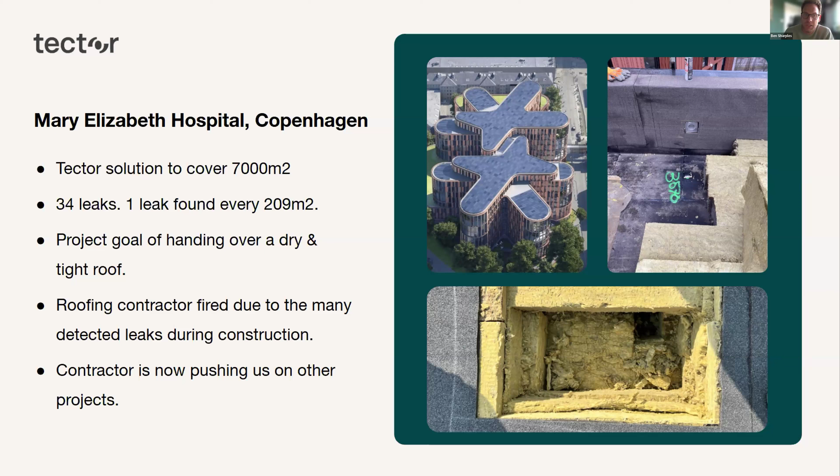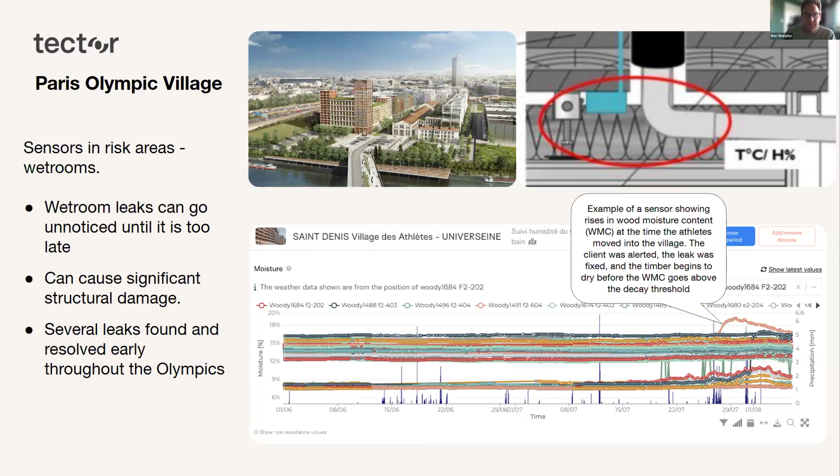And one last project that we have to shout about, because we're very proud of it, is Notre Dame, and we have 200 sensors in the roof there. They're in the main structural roof components known as the forest. Having seen a recent BBC documentary, because there's such a vast amount of timber in the roof there.

The roof is constructed using the traditional methods, and with that using green oak, so relatively freshly felled timber. And as we've talked about briefly earlier, timber is predictable. We know it's going to dry, and we know at what point it's going to get to eventually.

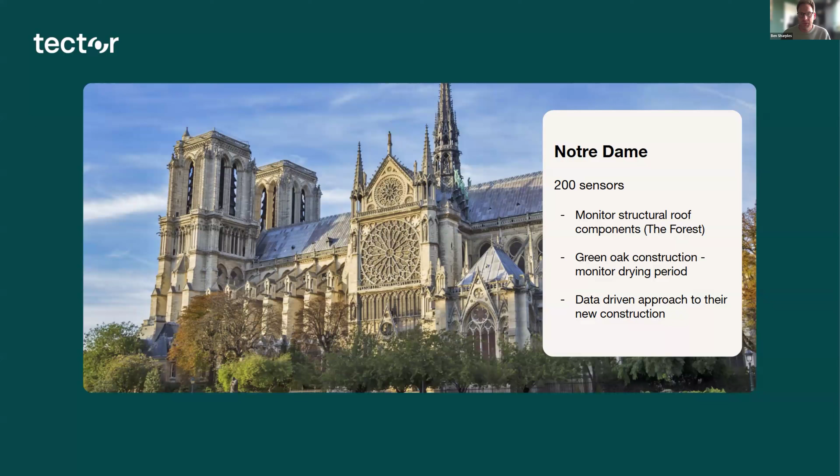By monitoring the drying process of the green oak in the roof, engineers are able to see how much movement they've got left, how the structural joints and connections are going to be compromised, and if there's going to be any distortion or further movement in the roofing structure. It also means they can install sensors in hard-to-reach spaces like that 34-meter tower, monitoring multiple locations without having to send somebody up there every other day to get new readings.

So in summary, we've just launched some different sensors which have an extended battery life now, up to 25 years, which has been feedback we've had from a lot of our clients. This not only takes us through the construction, the defects liability period, and the contractual liability period, but right through the operational phase, long into the asset's life of monitoring and protection of the buildings.

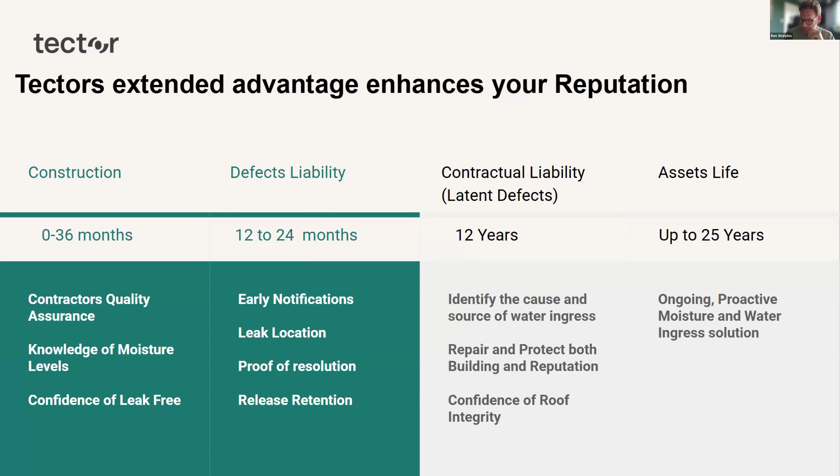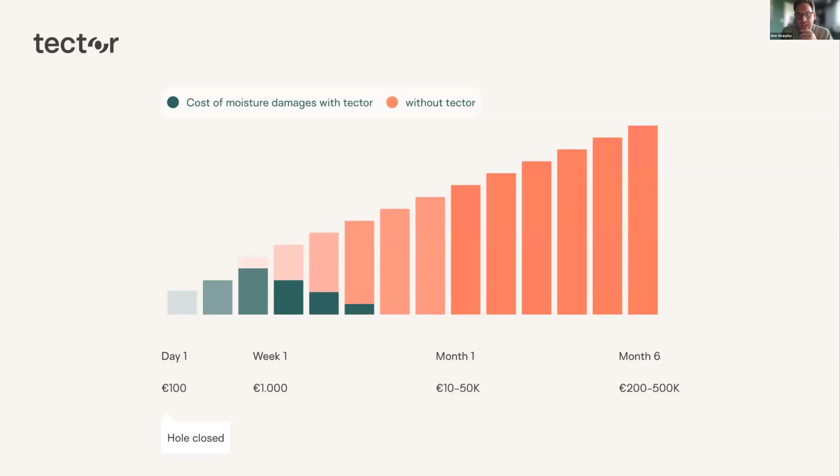The idea isn't that we're going to prevent risks, but that we're going to pick them up, hopefully within a week. Seven out of ten of our customers will fix a leak within a week of the alerts being sent, with the idea being that for a small initial outlay, these savings in the long term will be huge. That's it from me, thank you very much for listening.